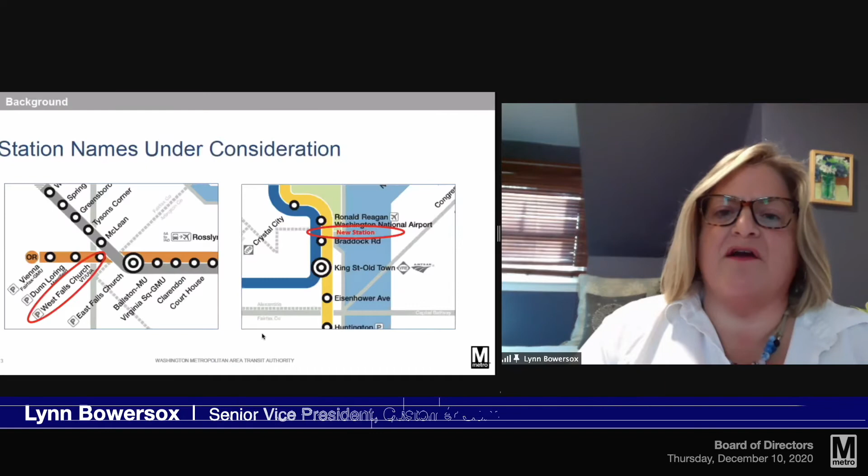So again, we are considering eliminating the UVA portion of the secondary name of West Falls Church Station because UVA is no longer located there. We're also considering today, the board is being asked to consider from the jurisdiction the new station name of Potomac Yard for the blue and yellow station that's under construction.

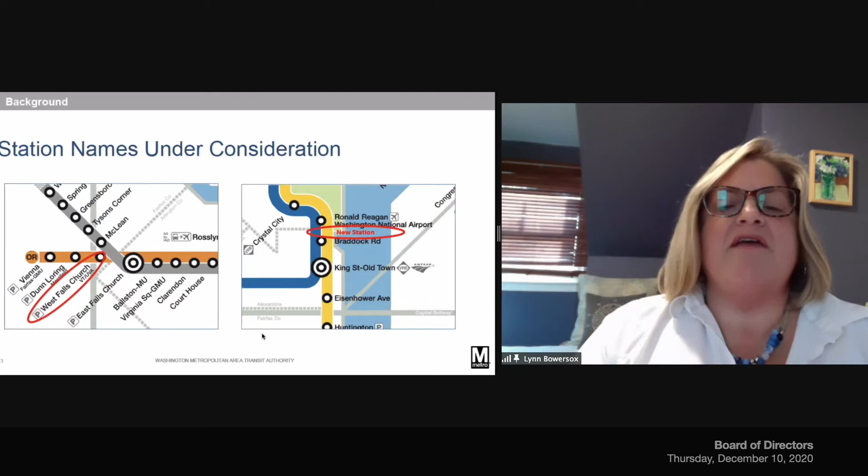If we go to the survey results, we find that 85% of the regional survey participants agreed that UVA should be dropped from the West Falls Church secondary name. 91% agree with the name Potomac Yard as the primary name for the new infill station. And there is a more mixed result with respect to Virginia Tech's application as a secondary name, because as a wayfinding matter, having it at 2 stations in Northern Virginia does pose some confusion for some customers.

However, because Virginia Tech is establishing a significant presence in Northern Virginia with the Innovation Campus, including technology industry collaboration, research and development and classroom facilities, among other space, we have no objection to the Virginia Tech name being applied as a secondary name at Potomac Yard and remaining at West Falls Church, and believe that over time, customers will be able to make that distinction.

That concludes my presentation, and I'm happy to answer any questions.

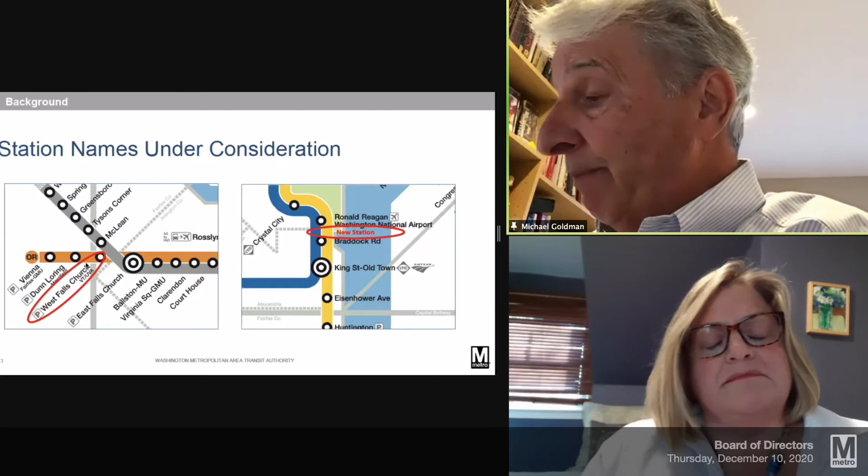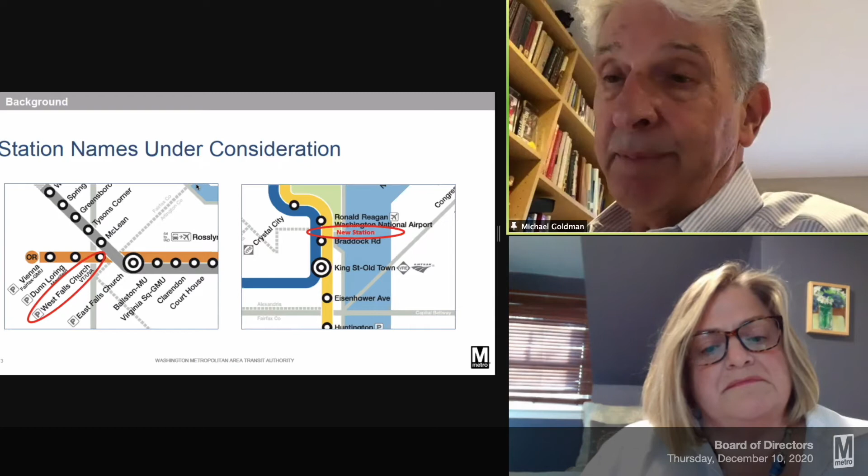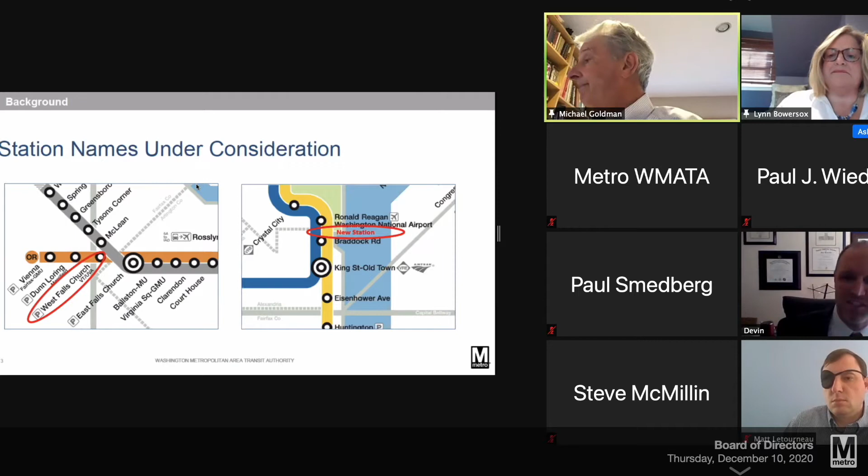Certainly, I have no major comments or questions. I did make a quick wardrobe change there, fitting for the discussion at hand. But no, one thing I would point out is having driven to both West Falls Church and Alexandria at rush hour to do night classes from Tyson's, it's good to actually have a metro there now, and I think that underscores what Mr. Smedberg said earlier and the importance of the system beyond just workers and commuting. It's expanded well beyond that. So I think this outlines a critical role for this system, not only today but moving forward as well. So nothing else for me.

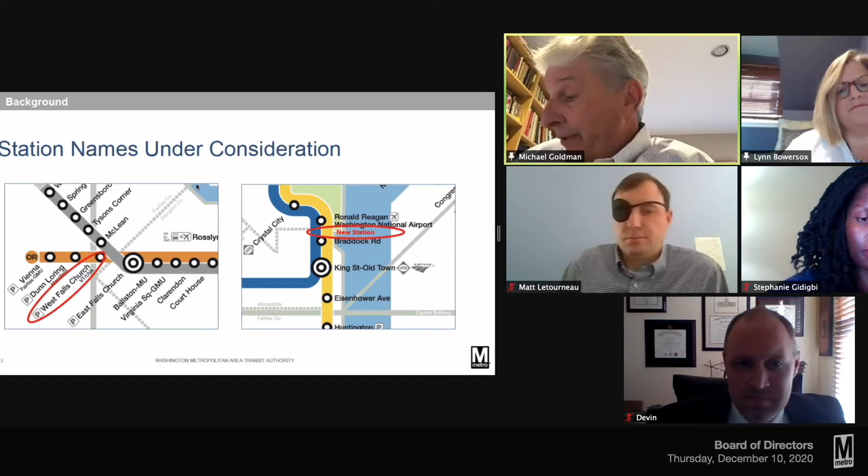So this is a significant development for Virginia and for the region in terms of what's happening at the Potomac Yard station and the whole national landing area with Amazon HQ2, and now the addition of the Virginia Tech campus, which was really one of the most exciting parts of that announcement.

So I don't take the exceptions to board policy lightly. I do think that there is potentially some confusion. One question I do have for staff is, so when it comes to universities, even on the picture on the left, we have Ballston MU and Virginia Square GMU, and there's other examples in the system. I went to Catholic University, so that was Brookland CUA, that are sort of in big letters as part of the primary name. What distinction do we make there? Why are some universities designated that way, but not others at all? And I think I know the answer, but I want to ask for the discussion.

Yes, sir. So Mr. Letourneau, at the time that the board determined the now current policy on station naming, it grandfathered in names of universities that were part of the primary station name. So those were not changed. Subsequently, though, it required that university names become a secondary matter in station naming.

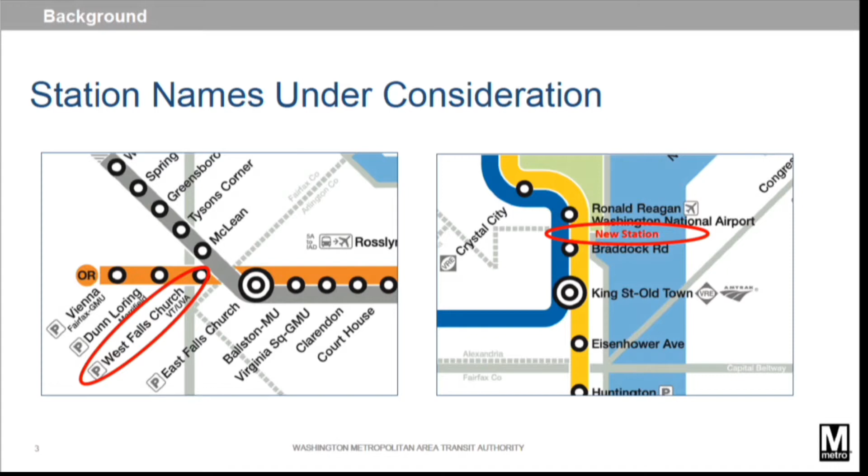Is that true for all universities, or if they're large enough, if they're the main campus, for instance, like at Foggy Bottom with George Washington, or for Catholic, could they still be a primary name? The board's current policy does not anticipate that even a main campus for a university within a half a mile of the station would be a primary name. No, sir. Okay.

But this is still an exception to policy because of the size and the fact that it's a secondary campus in terms of Virginia Tech. Yes, and I will say for the universities, particularly Marymount, Catholic, George Washington, those are in fact the primary campuses. Obviously Virginia Tech will ultimately have two different designations on our system, neither of which are the primary campus. So it does get a little dicey, a little confusing. I think it's appropriate for us to handle it this way to make sure Virginia Tech is included at the Potomac Yard Station, but for it to be sort of a secondary name as part of that station, similar to how it is at West Falls Church.

And I am supportive of this measure. I appreciate all the work that went into it. I know there's been a lot of discussion about this over time as this whole thing developed. But I'm really excited about the opportunity for that Potomac Yard Station to open and for it to have that Virginia Tech campus.

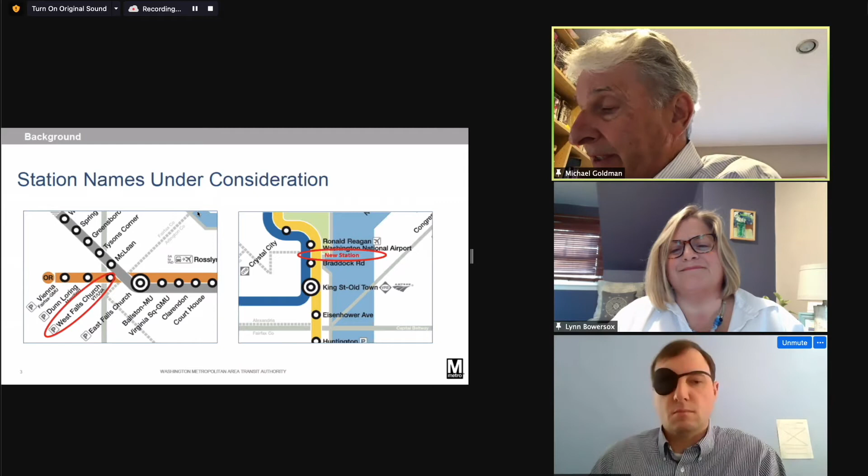All right, so we'll move on to other board members for questions. Secretary Slater. No questions for me, thank you. Mr. McMillan. I have no questions, thank you. Mr. Meridian. No questions, thank you. Chair Smedberg.

Thank you, Mr. Chair. Just to echo some of what Matt said, not only is this an important step for the city of Alexandria, National Landing, and Arlington County, but it is for the region. This is going to be a significant presence here, albeit at a secondary campus, but the activity surrounding the Innovation Center is going to have impacts well beyond the education community, as Ms. Bowersox highlighted earlier. So I'm supportive of this, and I think the Potomac Yard Station down the road is going to add a lot to the system in terms of ridership and use. Appreciate all the work, as Matt said, that went into this. There was a lot of talk around this, and thank you, Lynn, and your team for your efforts.

Thank you, Mr. Chairman. If there are no further questions or comments, I'd like to call for a vote on this item. I'll ask the board corporate secretary to take a roll call vote.

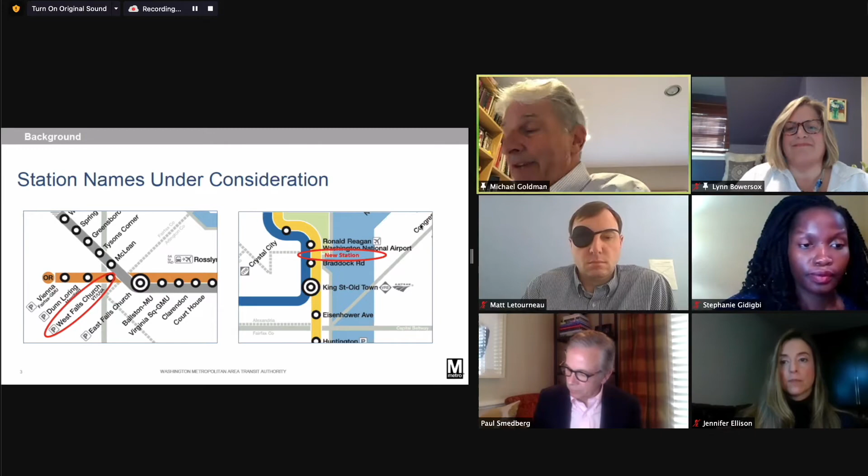That concludes the station naming item on today's agenda. Now we'll move on to the information item dealing with Silver Line Phase 2.

Before we begin that discussion, I would note again that Mr. Horner is recused from this item, and Mr. Rouse will participate in his place. Ms. Mason and Ms. Impastato will present the update for this item. Ladies?

Good morning, thank you for that. I am Laura Mason, our Executive Vice President for Capital Delivery. I'm here today to present an update on the Silver Line Phase 2. The purpose of the presentation this morning is to review significant unresolved issues, to provide you an overview of the safety and certification process, and to review the schedule to completion and acceptance for this project.

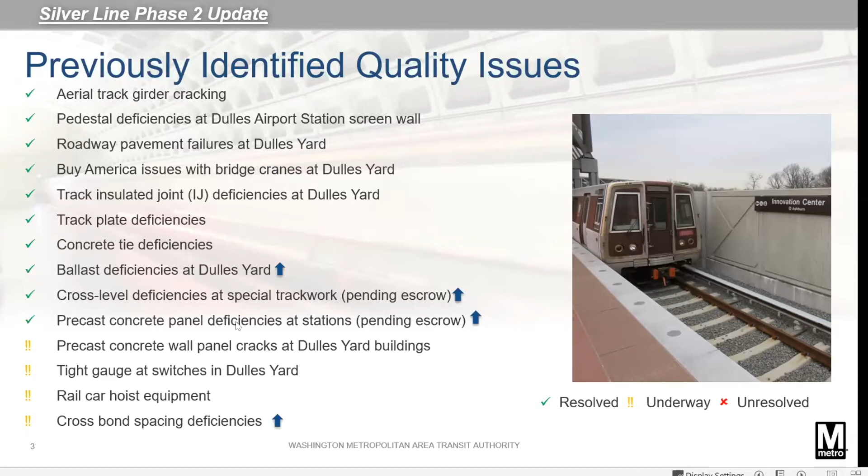Of the 14 previously identified quality issues, 10 have been resolved. Since our last briefing, 4 have seen improvement, as noted by the blue arrows at the end of each line item name. The ballast deficiencies at the yard have been resolved, and all sampling done has passed. The cross-level issues in our special track work, as well as the precast concrete panels, have been resolved pending agreement on an escrow account to address higher maintenance costs.

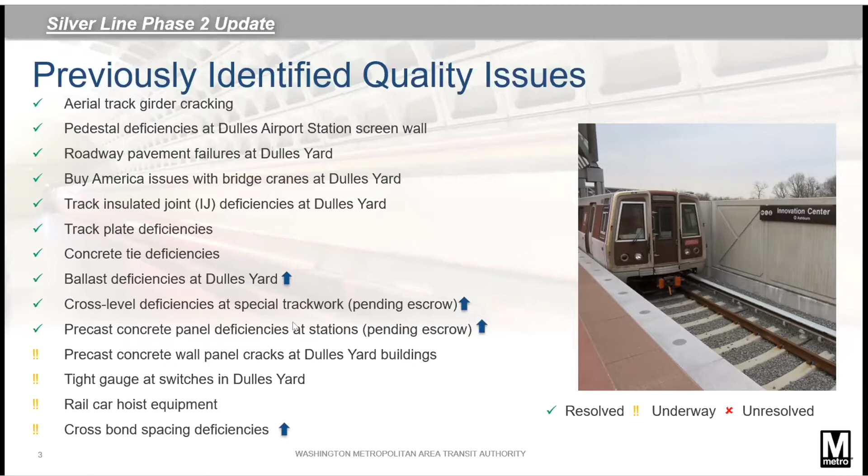Of the 4 issues underway today, I will focus on the crossbond spacing, which has progressed significantly since our last briefing. The other issues are included in the deck, and I'm happy to answer questions on them if you have them.

Looking at the crossbond spacing deficiencies, approximately 10% of the 200 locations have issues where the spacing requirements have not been met in accordance with our specifications and standards. The contractor, in coordination with Metro as well as the Airports Authority, is developing modifications required to address each non-compliant location and bring it into compliance with our requirements. This is still underway as the design has not yet been approved, but based on discussions to date, we believe they will be able to meet our requirements, and we are tracking this as a high-risk item until we have design approval and a schedule for implementation.

Today, I'd like to raise to the board's attention 14 additional issues that have yet to be resolved at the project level. Before I go into these issues, I would like to note that quality and non-compliance issues do happen in construction, which is why we focus on quality control and quality assurance programs to ensure satisfactory resolution of any issues identified.

To date, more than 1,800 non-compliance issues have been identified, and 98% of those have been resolved through the project processes. However, the 14 I raised today are, in our judgment, rising above the level of a typical QC item or a punch list item.

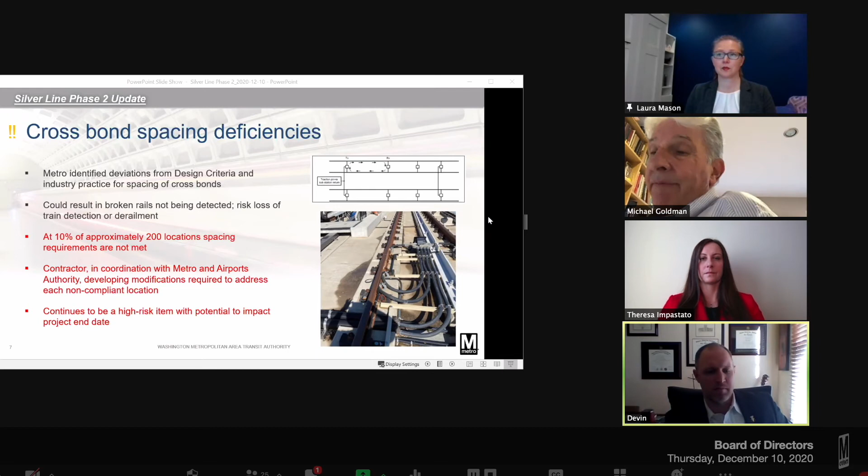At this time, no. I'm bringing forward those items I think warrant your attention. There are and will continue to be other issues that come up, and we will try first to resolve them at the project level. We've also implemented bi-weekly executive coordination meetings for technical review between myself, my counterpart at the Airports Authority, and executives from the contractor teams. So we are working through escalating issues that are not resolved at the project level, first to that executive level.

And if we are not able to get to resolution, we will bring them to the board. You have my commitment that I will continue to bring issues to you if I think they are not able or likely to be resolved in a timely fashion, and not have any surprises for you when we get to a point of being ready to recommend the project be accepted.

One of the things that I was hoping for clarification on, is this considered a new or an existing line of service by adding Silver Line Phase 2?

It is an extension, but I'm not sure I understand the intent of your question. When there's a new service, it requires a different type of analysis, particularly around Title VI. And I thought that this was considered an existing, or an extension piece. Are you telling me that is the case, or is this considered a new line of service?

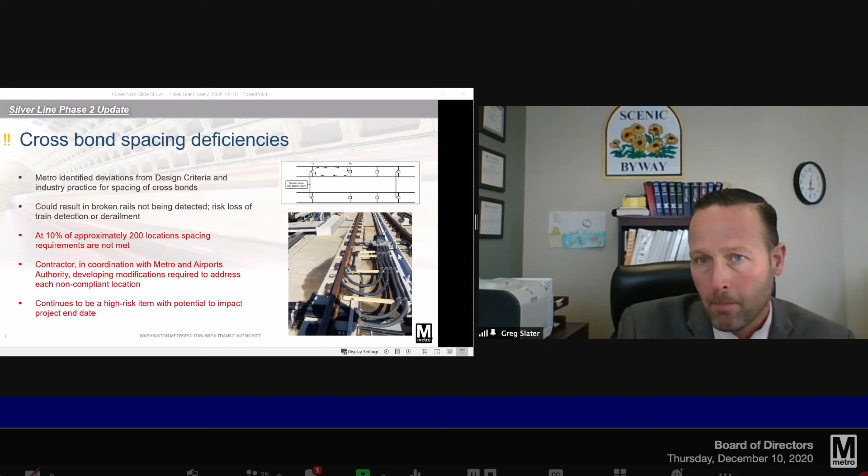That is likely correct, in the sense that it's a high risk item requiring design approval at each location, as well as implementation and testing. My only caveat is where we don't have a root cause on component failures, which could result in us learning something that would raise that above the Crossbond issue. But at this time, that is a correct statement.

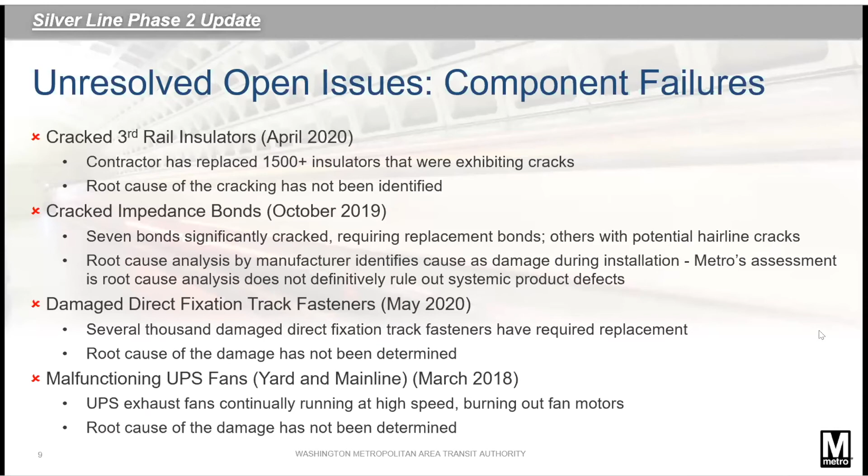So Laura, I know for some of these issues there's a range of acceptability. Like when we were talking about cross-level, you want it delivered to a very tight tolerance, but you would operate at a somewhat looser tolerance and still have an acceptable safety margin.

But if you were briefing us on an existing line, let's say the red line, and reporting that we discovered 1,500 cracked insulators and thousands of fasteners that had been replaced—without getting too far into hypotheticals—that sounds like a situation where we probably wouldn't be running the red line until we got to the bottom of it. Is it potentially that level of seriousness, the types of things you're finding here?

Not exactly. I think what it reflects is concern about the durability of the project. In all cases, these components have generally a healthy margin of failure in terms of that acceptability.

When do you suspend service? Before you suspend, you slow down service. So just taking the example of track fasteners, a single fastener being damaged does not warrant slowing down service, but a stretch where every track fastener is damaged would require slowing down service. And if we see the rail moving under load, we would potentially stop service. But what this reflects to us is either an installation issue, in which case we have concerns about how it was installed and how to ensure it won't be repeated, or potentially some other underlying issue.